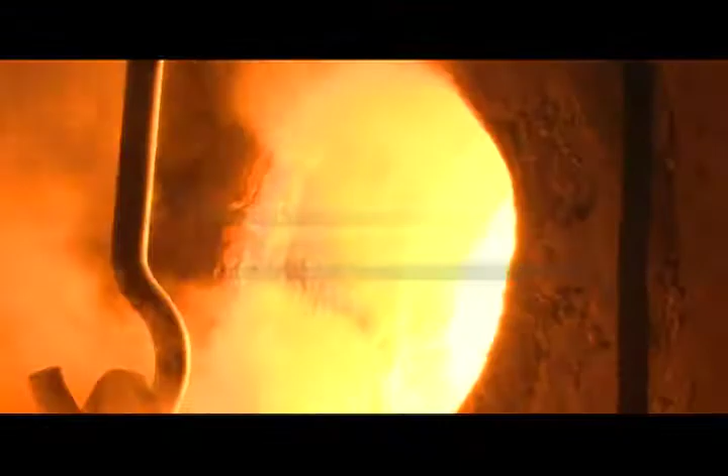The World Bank's recent survey of 183 countries around the world ranked South Korea as the 8th best place for business. Koreans have overcome poverty in the span of just a few decades, replacing empty lots with skyscrapers and factories. And the company has continued its impressive growth amid this dramatic transformation of the Korean economy.

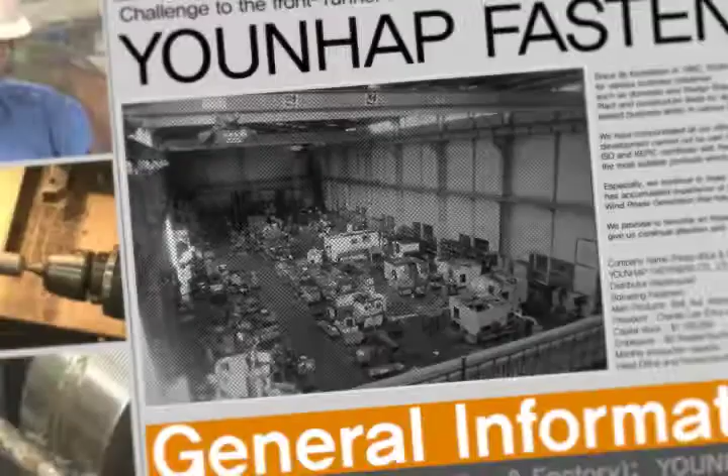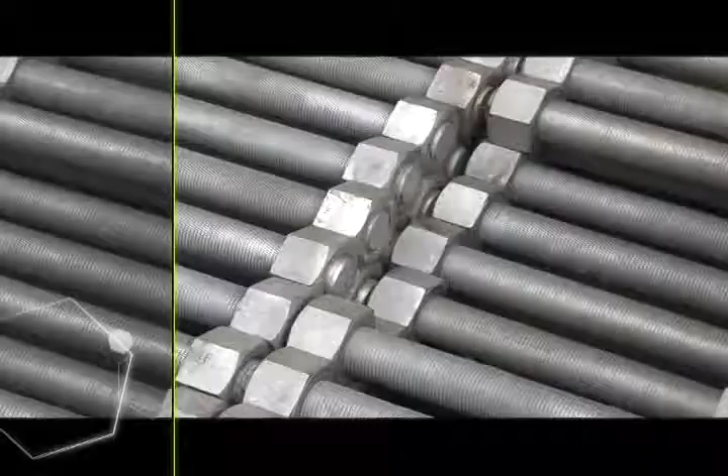Bogwang Fasteners, the predecessor of Younhap, was first founded in 1992 and located its main headquarters in Busan, not Seoul, with a view to bringing about a more even economic development nationwide. Throughout the last 2 decades, Younhap has made major contributions to the local, national, and world economies.

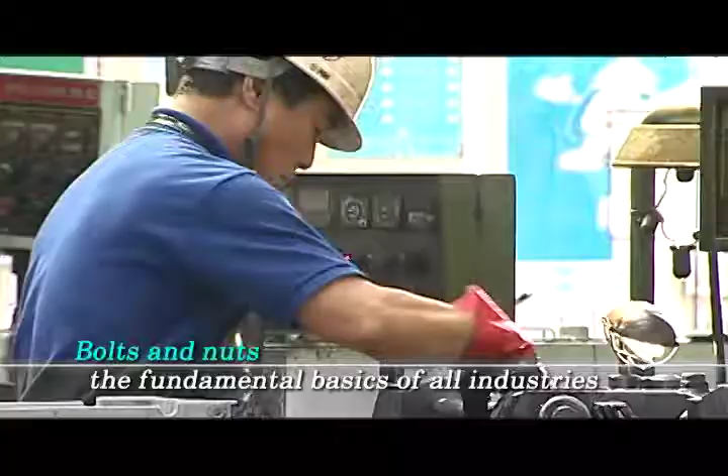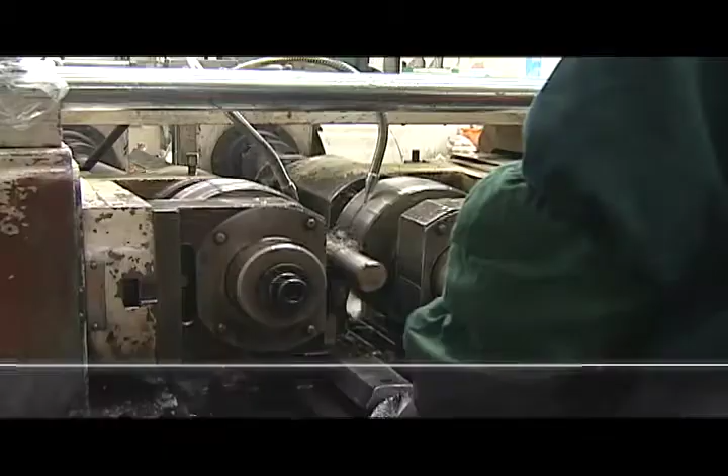The company produces bolts and nuts, the most fundamental and basic elements of all industries. The company, now providing bolts and nuts for various plants, including those for nuclear and wind power, earns over 20 billion won each year. It is the best manufacturer of bolts and nuts in the world, equipped with an optimal system for producing customized quantities of diverse models of products in the shortest spans of time possible.

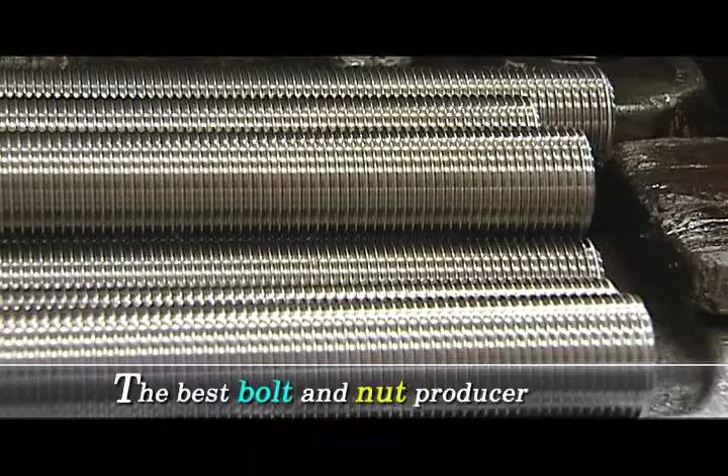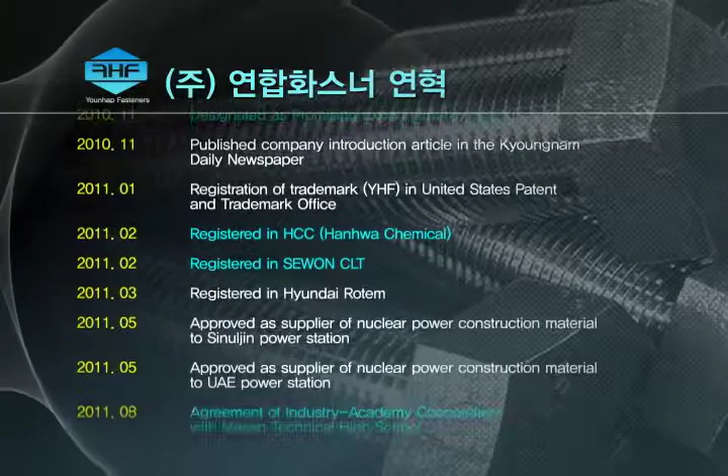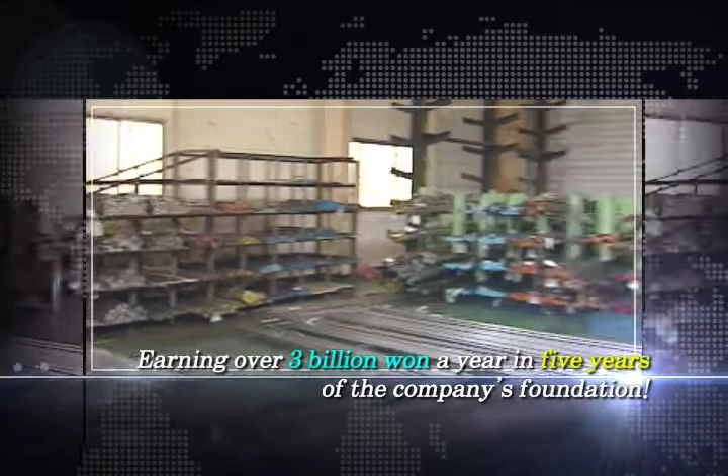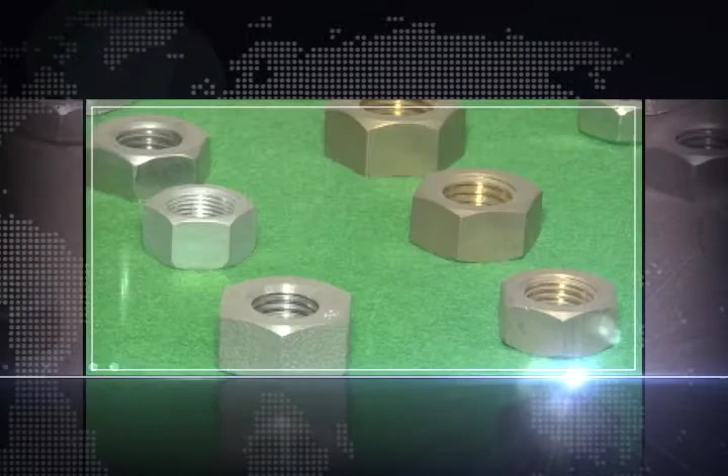Younhap grew to earn 3 billion won in sales each year on average within 5 years of its foundation. The company has steadily expanded its reputation by exporting its products to an increasing number of countries, including the US, Canada, the UK, Japan, and Hong Kong. Bolts and nuts form the most popular class of products, leading the company's revenues to grow by 15% annually.

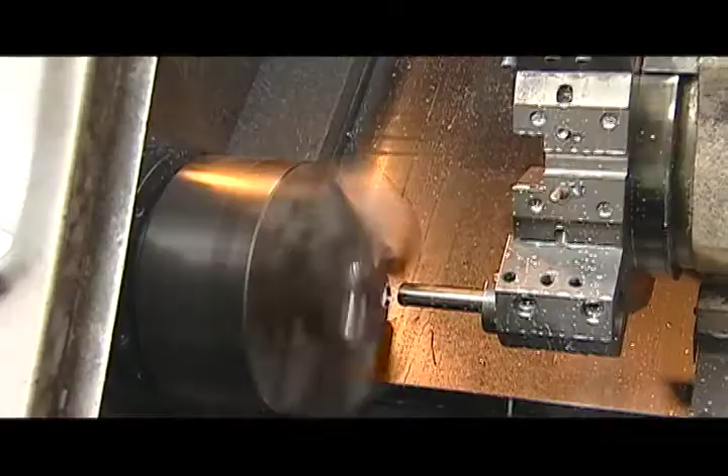Younhap's products, widely recognized around the world for their quality, are produced through the most rigorous processes and tests you can imagine. The main source of Younhap's strength is its cutting-edge production system and equipment.

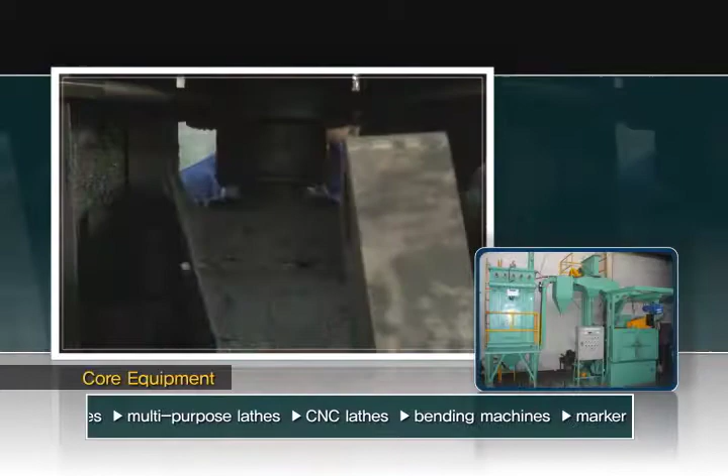In addition to 100-ton, 60-ton, and 20-ton forging processes handling diverse quantities of materials at once, Younhap's plant is also equipped with such core devices as automatic band saw machines, rolling machines, multi-purpose lathes, CNC lathes, a bending machine and a marker, a compressor, a dust extractor, a shot blaster, and an induction heater, all of which are essential for producing the best quality bolts and nuts.

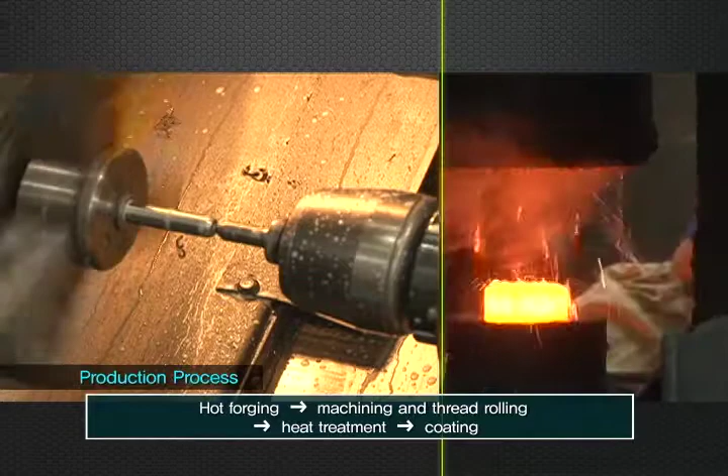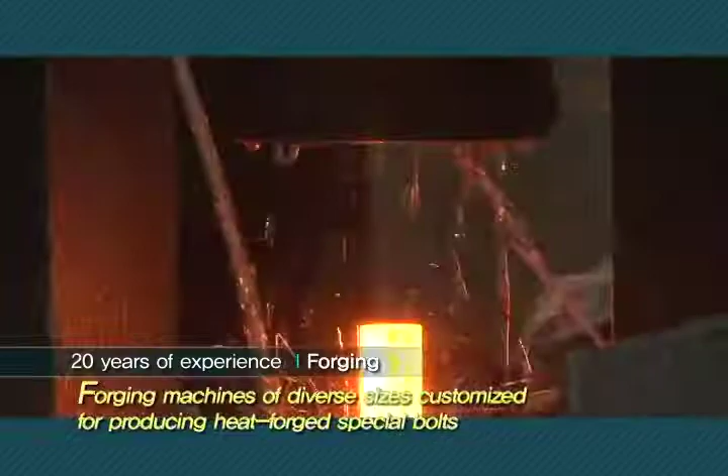Parts that are hot forged, machined, thread rolled, and heat treated by these devices are finally coated into bolts and nuts. The numerous forging machines that can process different quantities of materials and that specialize in hot forging special bolts are capable of producing a wide range of bolts, ranging from 1/4 inch to 4 inch in nominal diameter.

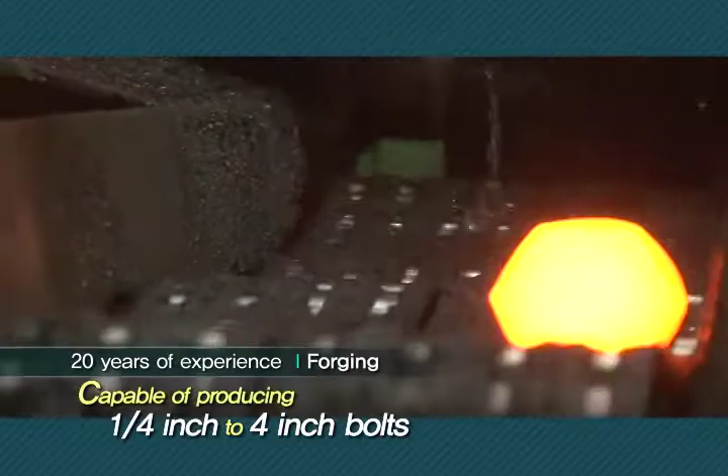Furthermore, the company possesses equipment and expertise to produce bolts of all materials, including carbon steel, alloy steel, stainless steel, non-ferrous metals, and special steel.

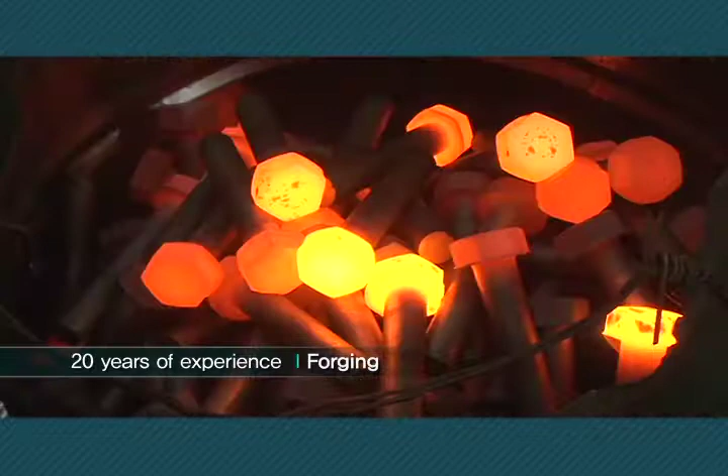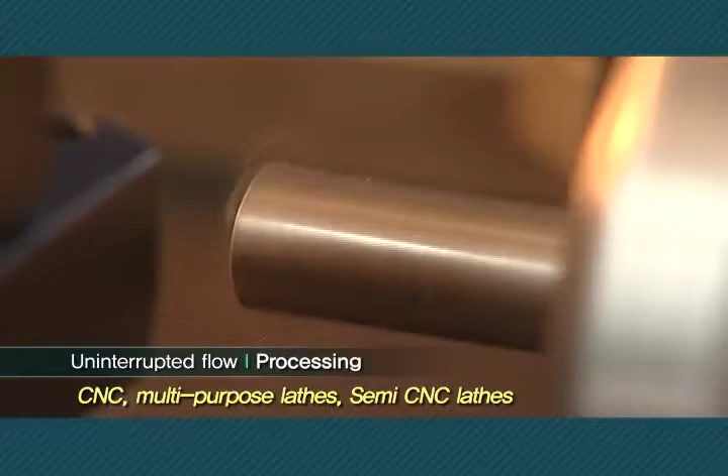Forged materials are next subjected to processing. The company has achieved the most efficient arrangement of its CNC and multi-purpose lathes and semi-CNC lathes in a way that facilitates the processing of small quantities of various models.

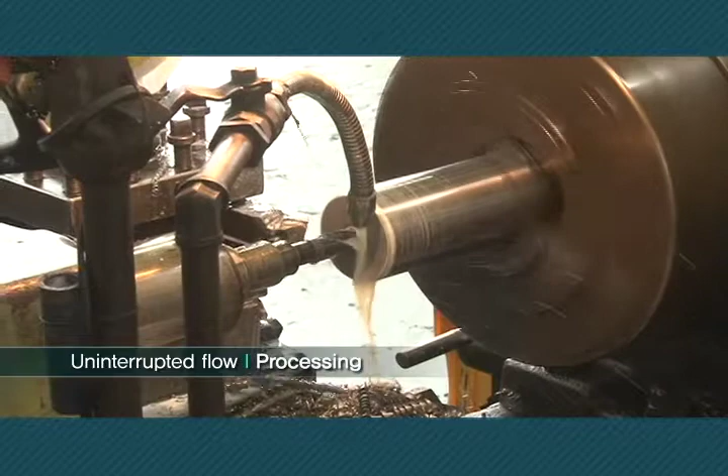This layout enables the company to meet even the most urgent and unpredictable demand by producing all special types of customized bolts, even for power plants, in short spans of time.

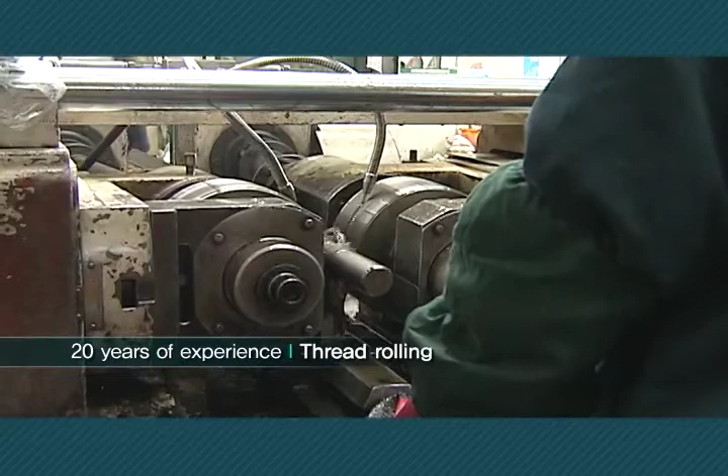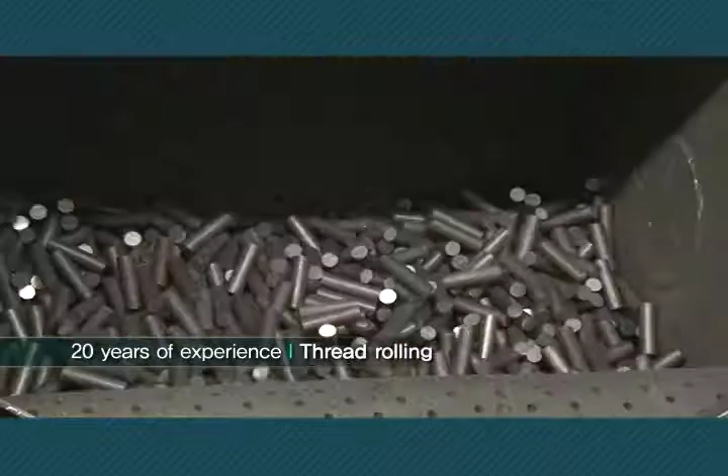Thread rolling machines capable of processing materials of different quantities also play a significant role. Younhap is capable of rolling a broad array of bolts, including the normal ones, thin ones, angular ones, and even special ones. The company possesses the most diverse range of die molds in the industry.

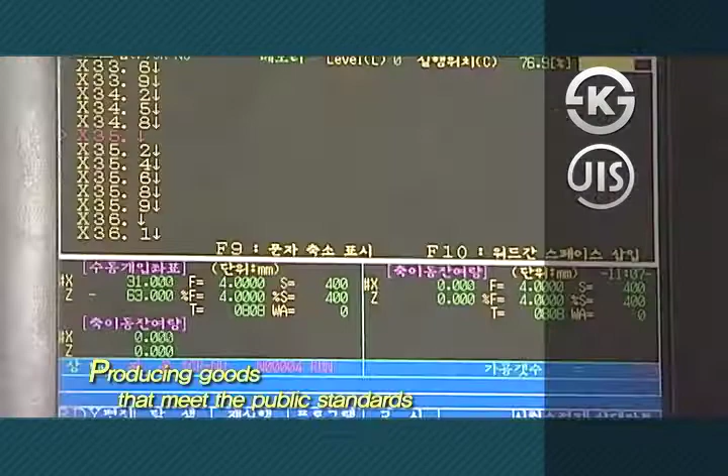In addition to producing high-quality products that meet such public standards as the KS, JIS, ISO, ANSI, DIN, and EN, the company provides special and customized bolts that are widely praised not only in Korea but also abroad.

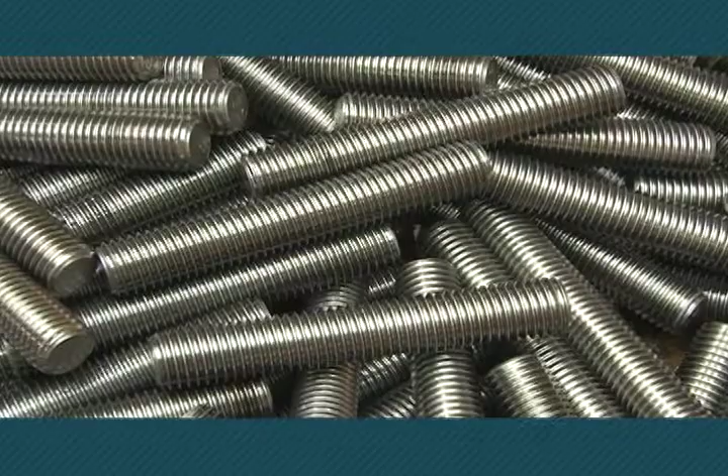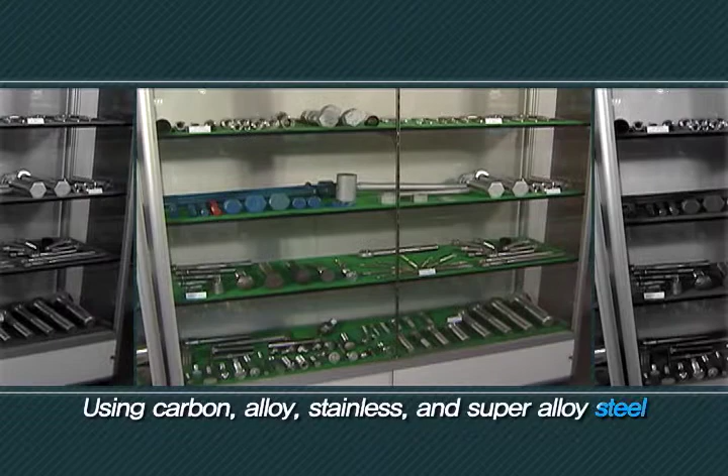At present, Younhap is concentrating on producing bolts and nuts for nuclear, wind, and on-land power plants. The company already provides a wide range of bolts and nuts for these plants, made of carbon steel, alloy steel, stainless steel, and super alloy steel. Each type of plant requires different bolts and nuts.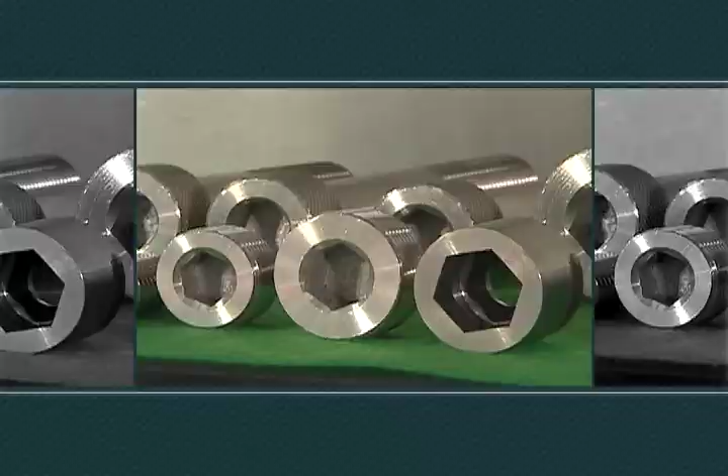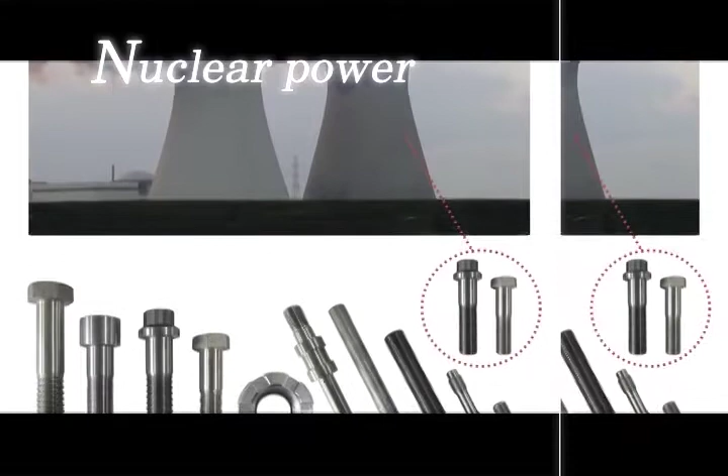As for products for nuclear power plants, only products of the highest quality that meet the strictest safety standards are provided. Since safety is the highest priority for these plants, only bolts and nuts of proven quality and lifespans are used. Bolts and nuts for turbines in particular are made of high alloys so as to withstand extreme variations in temperatures and pressure levels.

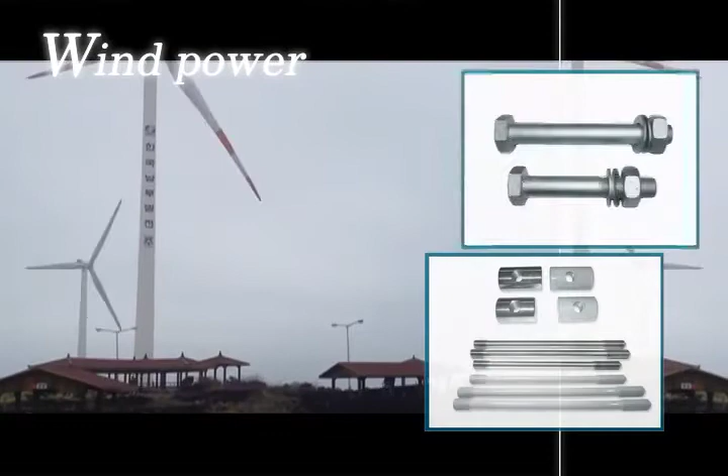Second, bolts and nuts used at wind power plants must possess high mechanical quality and be durable, withstanding fluctuations in surrounding weather conditions characterizing coastal and mountainous areas. Younhap provides for these plants only bolts and nuts that have endured over 720 hours of salt spray testing.

Third, bolts provided for offshore drilling devices and power plants must withstand the salt and chlorides present in the surrounding waters. Most of the products supplied for these plants are PTFE coated and made of super alloys with chemical and corrosion resistant quality, even in various chemical settings.

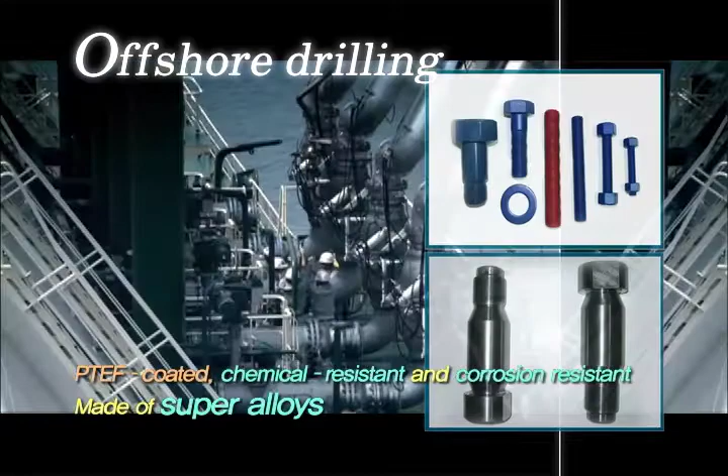In addition, bolts and nuts provided for construction and on-land power plants are mostly made of low alloy heat-resistant steel to provide the necessary tensile strength to hold various pipes together.

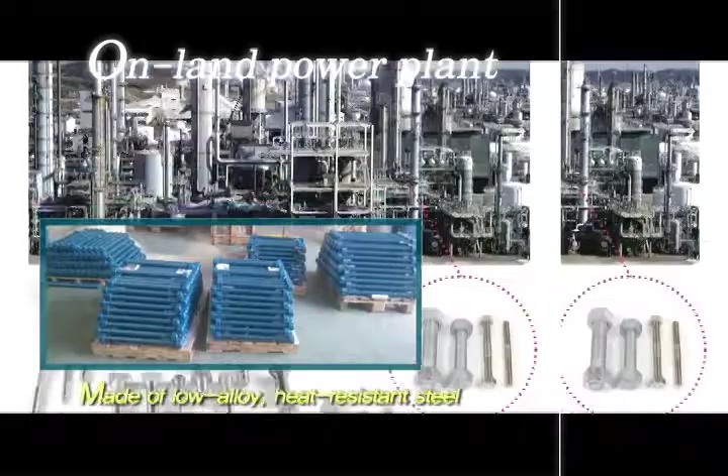The biggest strength of Younhap is that it is equipped with the most efficient and optimal production system, capable of producing customized and special products for clients' perfect satisfaction. We always keep a stock of over 3,000 tons of our standard products in order to respond to and satisfy diverse needs and requirements worldwide.

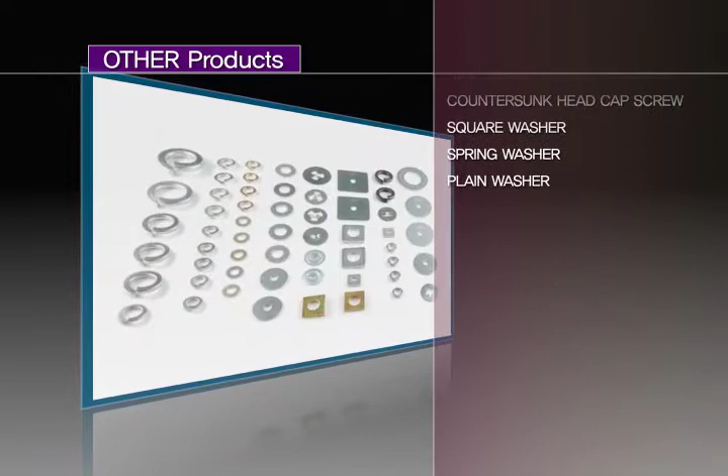These highly durable and corrosion-resistant products are made of stainless steel and can be used almost permanently, notwithstanding extreme changes in weather conditions over time.

Younhap counts among its major clientele such leading companies of Korea as Doosan Heavy Industries, renowned for their seawater desalination plants, Samsung, known for their shipbuilding, and SK, leading on-land plant development. Younhap has also partnered with numerous nuclear and wind power plants in Korea, as well as widely recognized multinational corporations in petrochemicals and construction, such as GE, Chevron, and Kobe Steel, earning over 20 billion won in sales last year alone.

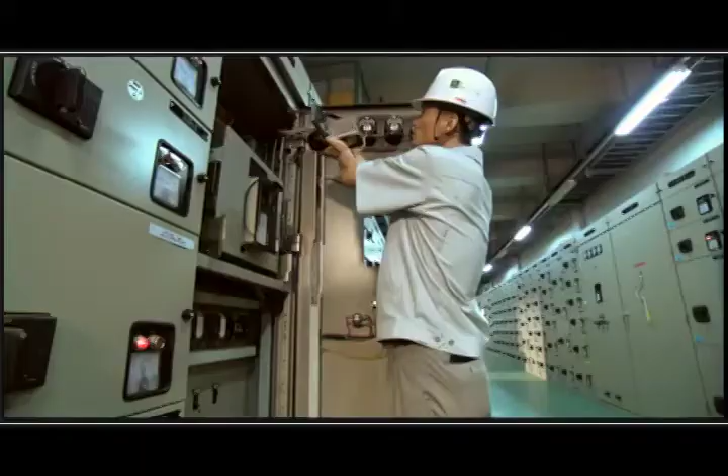To achieve this success, Younhap has tirelessly improved and innovated its plant, office, and research center, promoting the productivity of employees and their communication, and always stepping up to rise to new challenges.

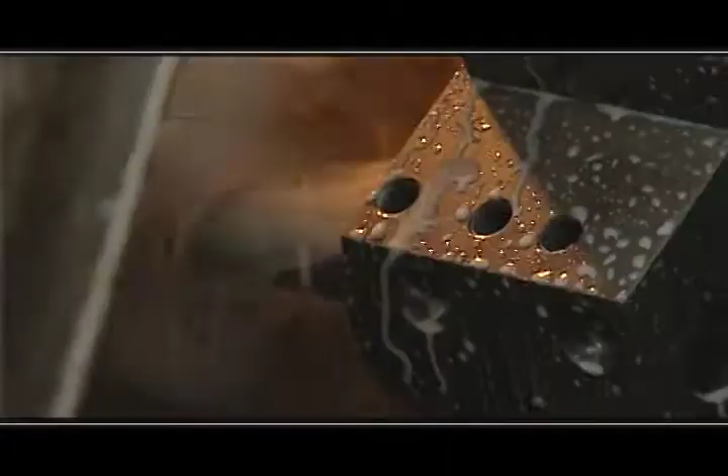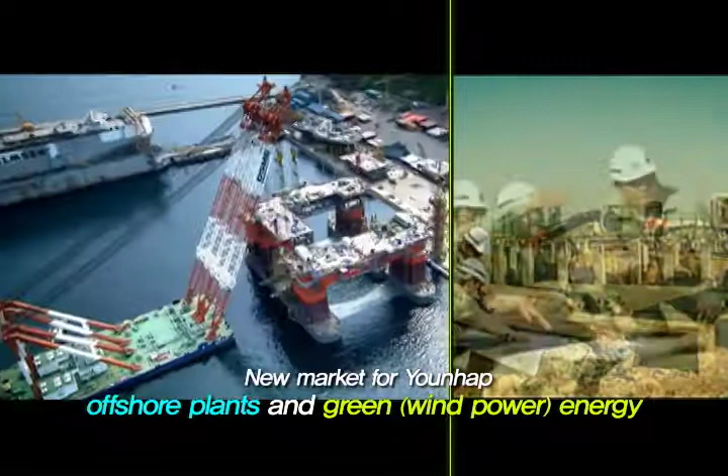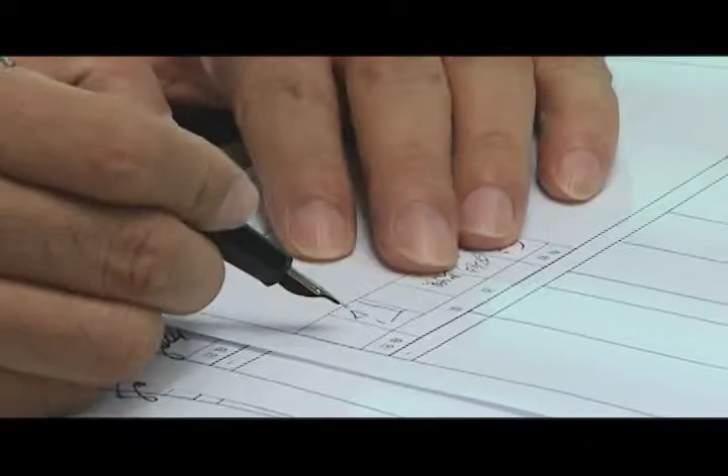It was while working with Korean companies building nuclear power plants in the UAE that Younhap discovered the potential of offshore plants and green energy like wind power. CEO Charles Lee, inspired by the prospect of these new industries, has since established a thorough plan to develop and provide high-quality bolts and nuts catered to offshore and wind power plants.

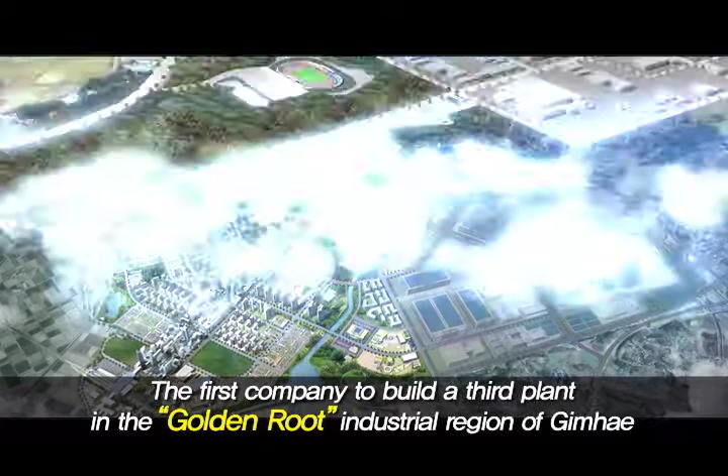Younhap has accordingly expanded its production capacity by building its third plant in a newly formed industrial cluster in Gimhae. With the new plant completed, Younhap now actively recruits talented workers and researchers to help the company become a leading provider of materials needed for plant development in Korea and abroad.

Businesses, as corporate citizens, have an obligation to share their profits with the rest of the community. Younhap is remaking itself into a socially responsible company, taking part in diverse activities of sharing and communal engagement. In addition, the company provides increasing support for the health, recreation, and well-being of its employees.

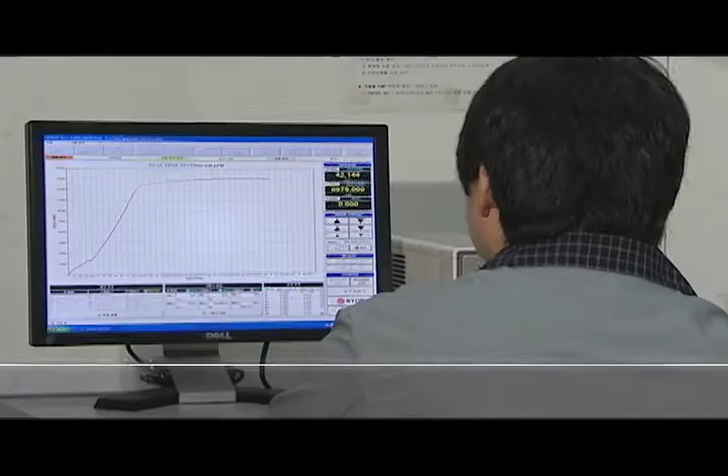The company is united in its single-minded pursuit of becoming the best it can be, never swerving from its central commitments. The illustrious accomplishments the company has achieved so far continue to shine and guide it.

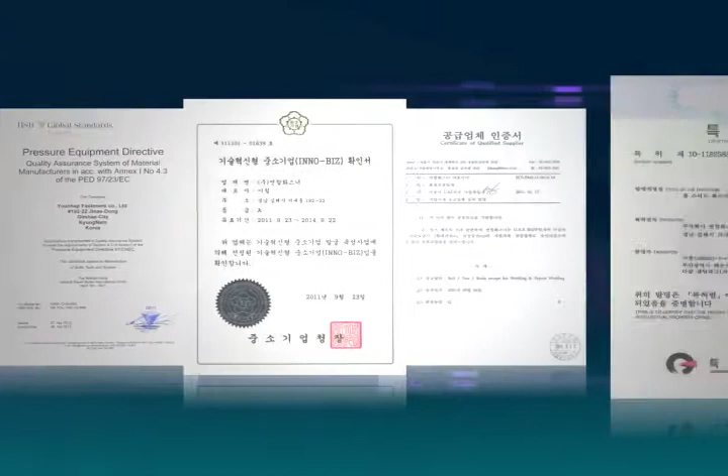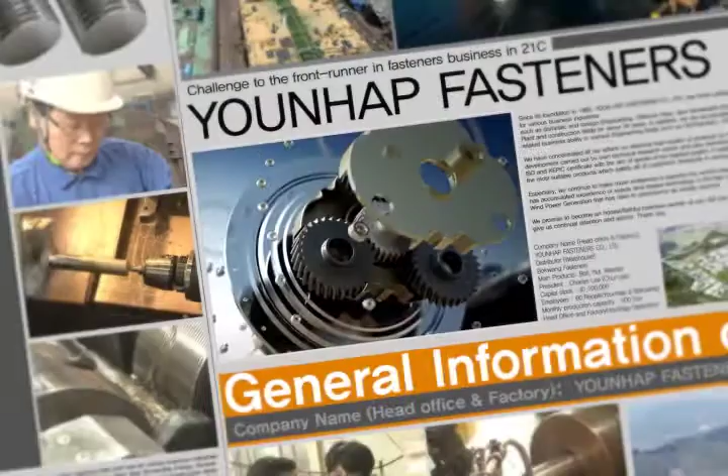At Younhap, we are working hard to maintain our lead in the industry by managing our global operations with a long-term perspective and enhancing the welfare of all our employees. Younhap is the partner you need to rise to a new level of success.

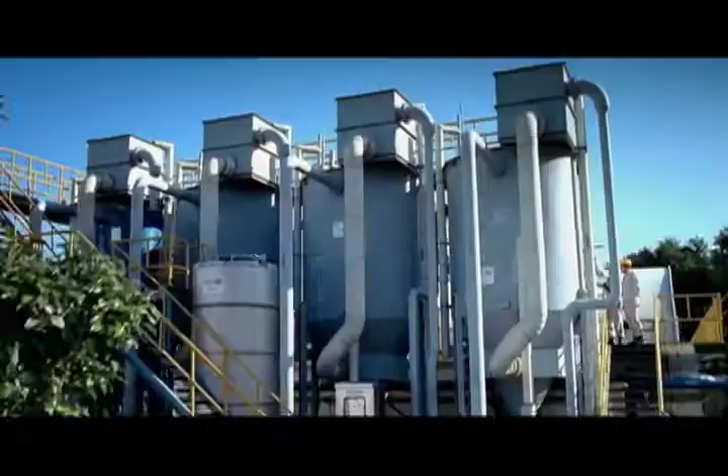Younhap is a company that never tires of rising to new challenges and innovating itself with new hopes. On the basis of Younhap's hard work and achievements, the Korean industry will continue to develop and flourish.